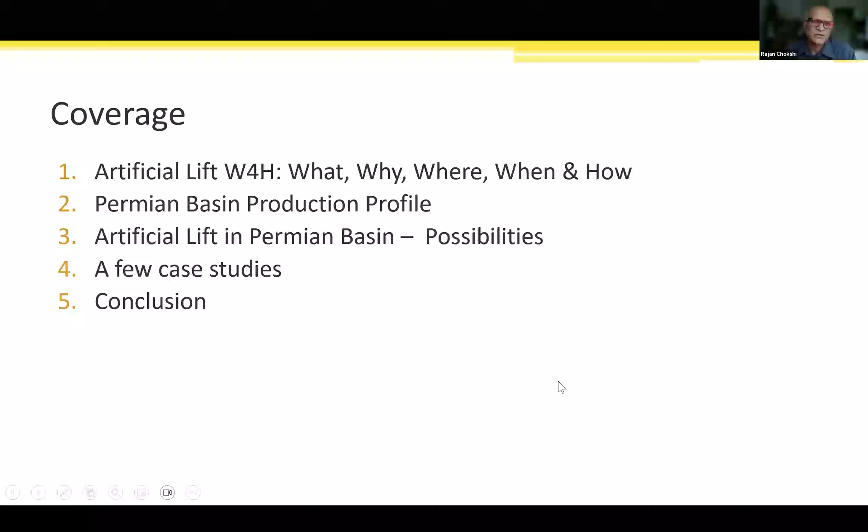Next, we will look at what the Permian Basin is and what its production profile is, because artificial lift and production profile are closely linked, so we need to understand that. Then we will go into how artificial lifts are applied, or what the possibilities are for the Permian Basin. I will sprinkle in a few case studies, though this is not representative of everything being done, because as you will see, the scope of activities in the Permian Basin is very, very large, and my knowledge base is limited too. I hope this serves as an introduction for you to delve deeper if this topic is of interest to you. So with that, let's go into the artificial lift introduction.

We have to look at the life cycle of an oil and gas well. By the way, artificial lift applies to both oil and gas wells, even though most of our discussion today is centered around liquid-dominated production.

When you look at the life cycle of a typical well, after initial prep work and drilling completion is done, you have a relatively flat plateau period which may last several years of naturally flowing production, during which production declines gradually but slowly, and then there is a sharp decline toward the later half. Traditionally, companies have focused on artificial lift during this part of the life cycle. So artificial lift applies for the majority of the life cycle of an oil and gas well - that is your takeaway number one.

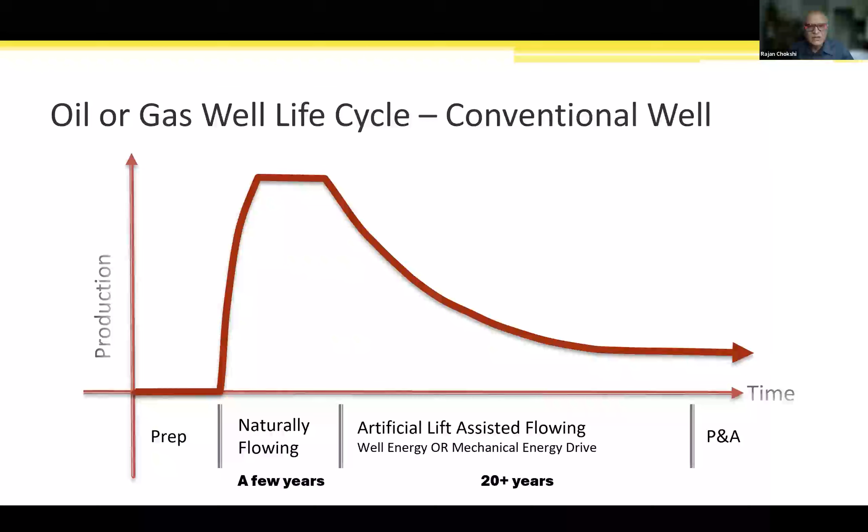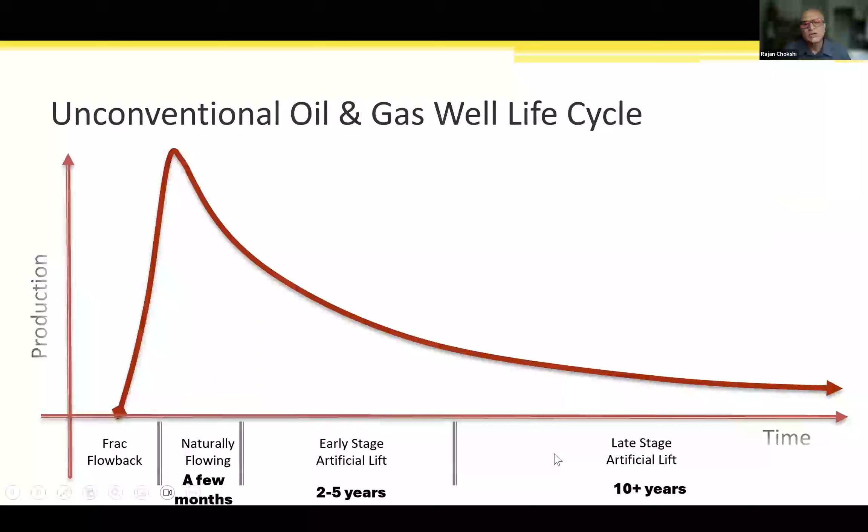Now, this is the conventional well. When you look at unconventional oil and gas life cycle, the plateau period is not as long - it could last a few months to maybe a couple of years at most. So as soon as the naturally flowing phase is over, you apply artificial lift to sustain production. Now, if you look at the artificial lift distribution around the globe, these are all guesstimates because most companies do not publish this data.

But the fact remains that nearly each and every oil and gas producing region relies on some form or fashion of artificial lift. Oil wells and most gas wells will need artificial lift at some stage in their life cycle.

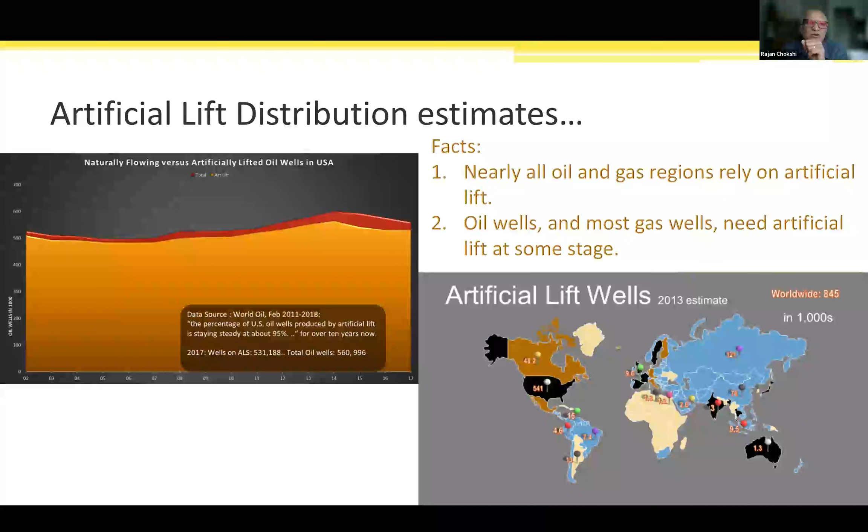A rough estimate in the US, we have more than 90% of the oil producing wells on artificial lift. And based on my informal surveys, more than 65 to 70% of the population of wells worldwide is on artificial lift. Now, why do you need an artificial lift system?

Whether it's a green field or brown field, it's basically production acceleration, or in case of brown field, when you have tired production, you have reservoir pressure decline, water cut increases, which means you have to provide some additional boost. In case of infill drilling or EOR strategy change, there will also be changes into the chemistry, or constitution, of the production, which necessitate the need for an artificial lift system.

So overall, if I have to say two words, then I would say production optimization. Production optimization of a producing oil or gas well relies heavily on artificial lift systems. Okay, when do you need artificial lift?

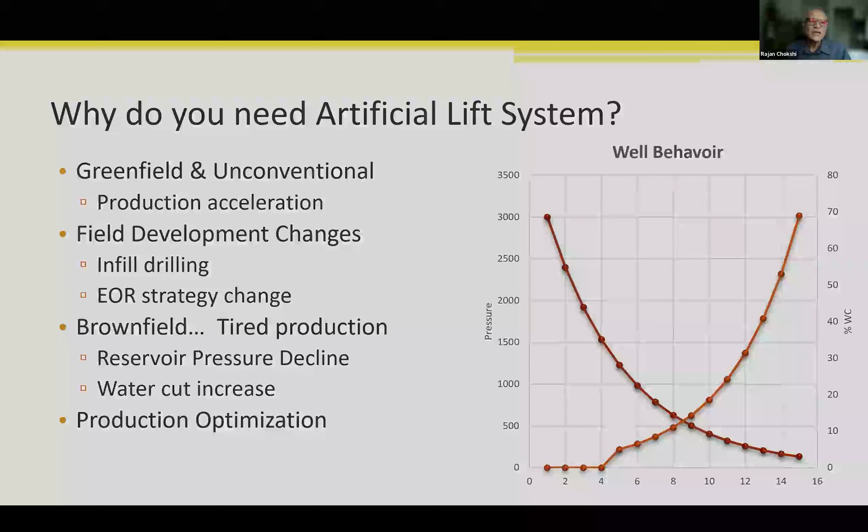If I have to give you a very simple explanation, we have two boundaries: at the wellhead, at the reservoir, and then there are some differential pressures that need to be overcome as the fluids traverse from reservoir all the way to the wellhead.

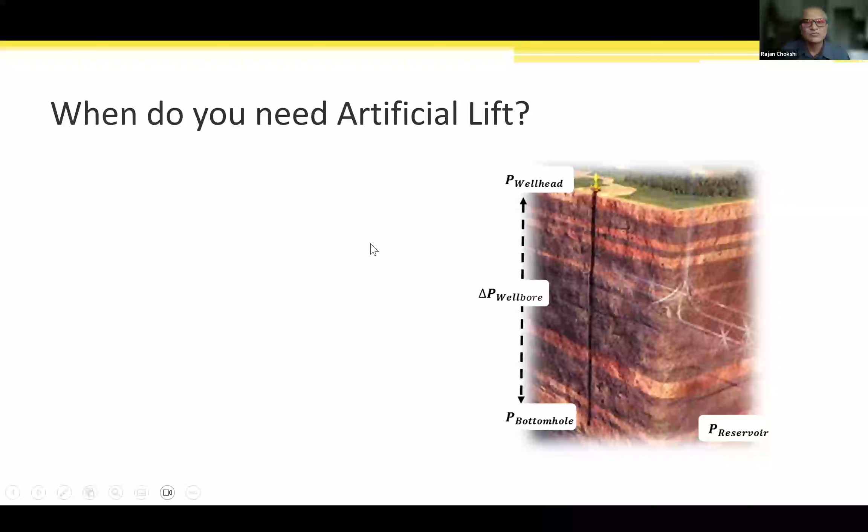So when do you need artificial lift? To bring the fluids to the surface when available reservoir energy is insufficient, meaning either the fluids do not flow, or they flow in quantities which are less than the desired quantity. This desired quantity would depend on what are the operator's expectations on the rate of return, etc.

So in short, when you require higher than natural flow quantities, that is when you must think of artificial lift. And these are the only expressions I am showing here. But if you take a small flow segment, then you can subdivide it into this kind of partial differential equation, whereby the total pressure loss over a small segment comprises of three elements: elevation, friction, and acceleration.

Elevation mostly depends on the density and the deviation. Friction would depend on the velocity and the friction factor, as well as the diameter. And acceleration, for the most part, we ignore.

And why do I talk about this? I talk about this because as you start thinking about artificial lift, you have to pay attention to: what is the density, what is my well completion profile, and what is the size of the tubular? These are the three main factors.

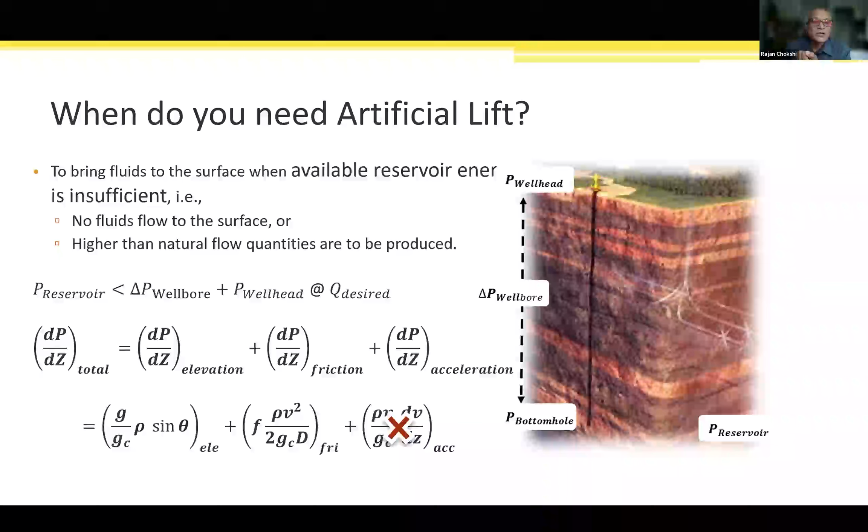Of course, you have to pay attention to the fluid characteristics, like what is the API gravity, what is the water cut, which again end up coming into the density. By the way, there are many sophisticated software packages, and you might have used some of them, available to size and design artificial lift.

As the fluids flow through the reservoir, when it comes into the wellbore, you have bottom hole flowing pressure, and then it needs to be high enough so that it can overcome flow resistance and then arrive at the surface.

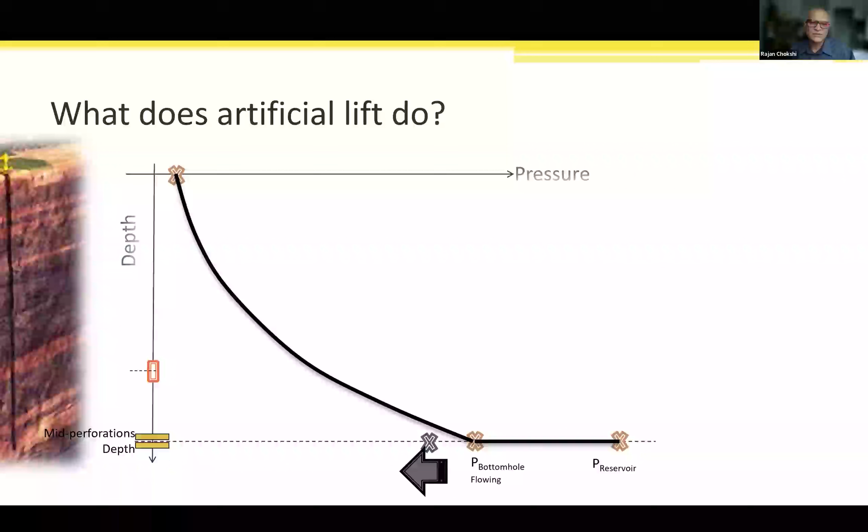Now, at some point, what is going to happen? Your reservoir gets tired. You do not have sufficient bottom hole flowing pressure. In that case, as this gray line shows, the fluids do not flow to the surface. And you have to think of providing some kind of boost, or you have to provide what is called TDH, or the total dynamic head.

And that's where this red box that I'm showing here comes in - it's an artificial lift system. You have to lower some kind of artificial lift system, some equipment, some mechanism to provide this total dynamic head or boost. There are a variety of ways you can apply artificial lift.

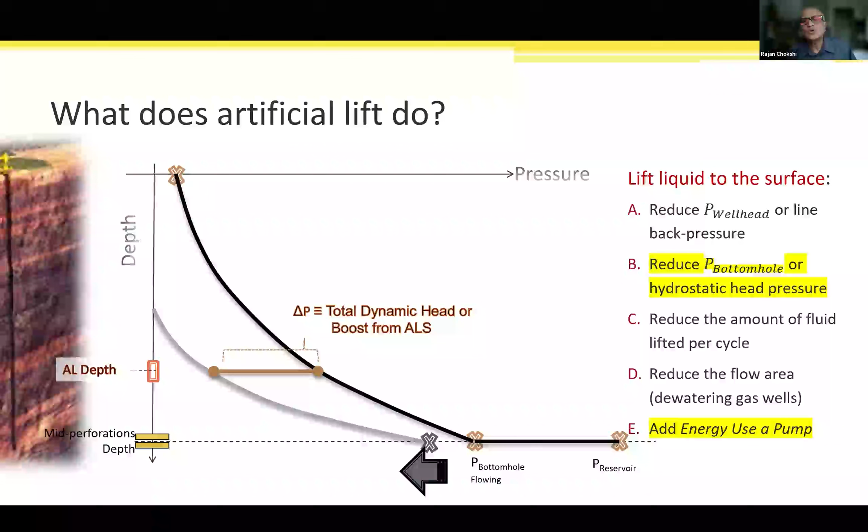You can reduce the wellhead or line back pressure. That is easier said than done, because most of the time your wellhead pressures are dictated by what your surface facilities are. You can reduce the bottom hole or hydrostatic head pressure, or you can add energy using a pump from the surface. Now, you might have seen in the nodal analysis classes this inflow versus outflow and lift capability.

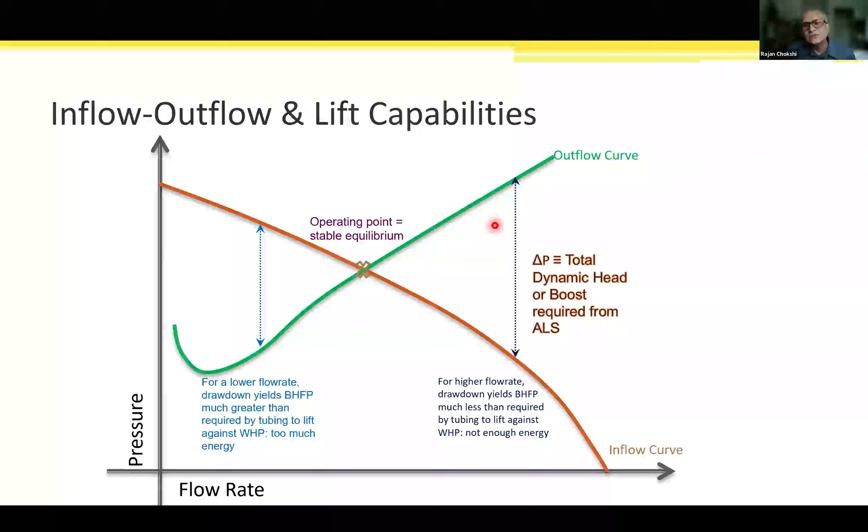This green curve is the outflow curve, which is the resistance presented by the surface facilities as well as the tubulars, wellhead tubulars. This resistance also varies with flow rate. Whenever these two curves intersect, that's what is called the operating point, or stable equilibrium. If you want to produce to the right of this operating point, you have to provide some additional boost—and that's where artificial lift systems come into play. That is your one takeaway from this inflow versus outflow discussion.

Now, what happens often with tired reservoirs, with increasing water cut and such, is your outflow curve will shift—the earlier green curve becomes a red curve, and there's no intersection. Or as reservoir capability declines, this orange curve, the reservoir inflow curve, shifts to the left. In some cases these shifts can be very dramatic and drastic. In a traditional conventional reservoir, this could take years to shift like this, particularly with an active water aquifer. In unconventional or tight reservoirs, this shift in the inflow curve can happen over a matter of months or weeks.

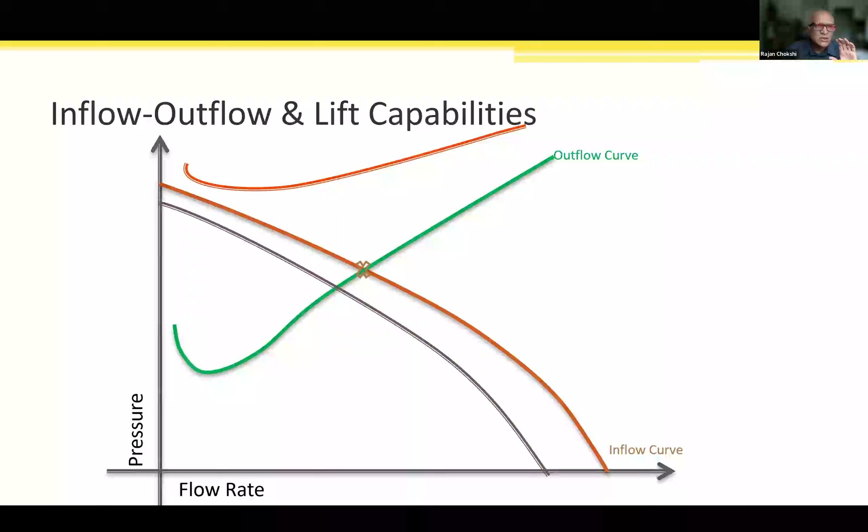So why am I bringing all of this up? Because when you're thinking about artificial lift, you have to think of this interplay between inflow and outflow—how your reservoir characteristics are changing, or how your tubular characteristics or tubular response is changing. That brings us to a quick intro to different types of lift systems.

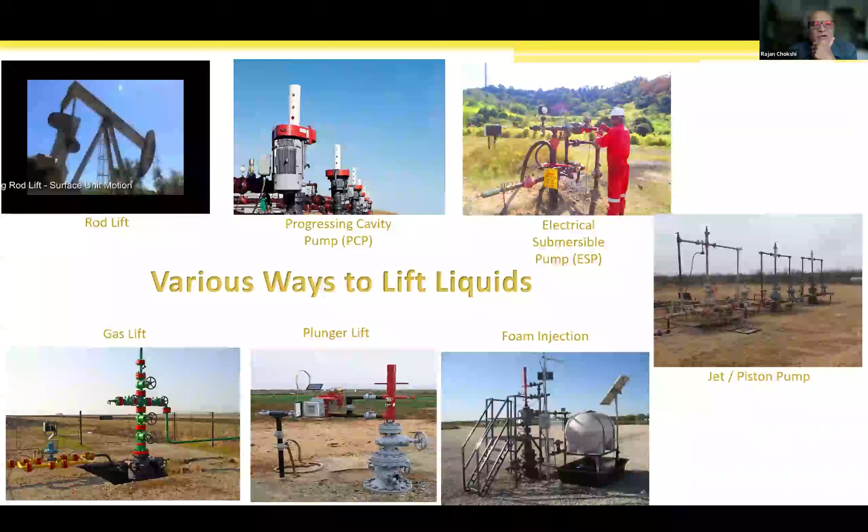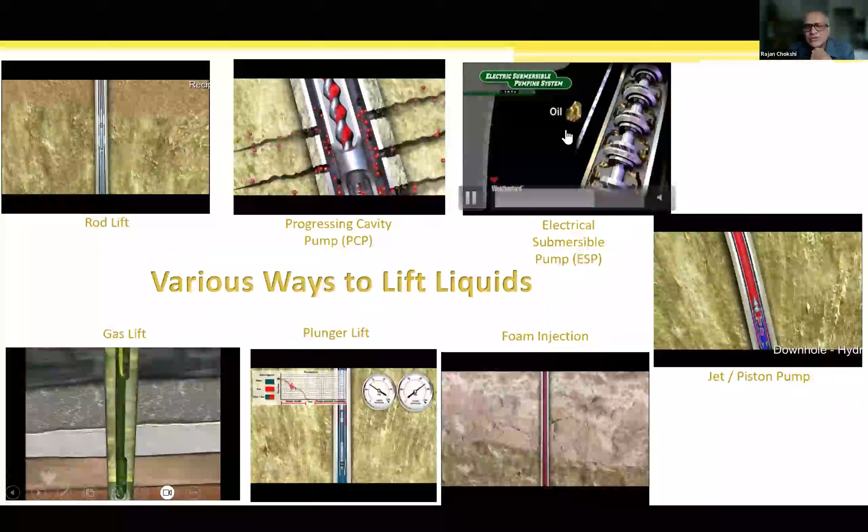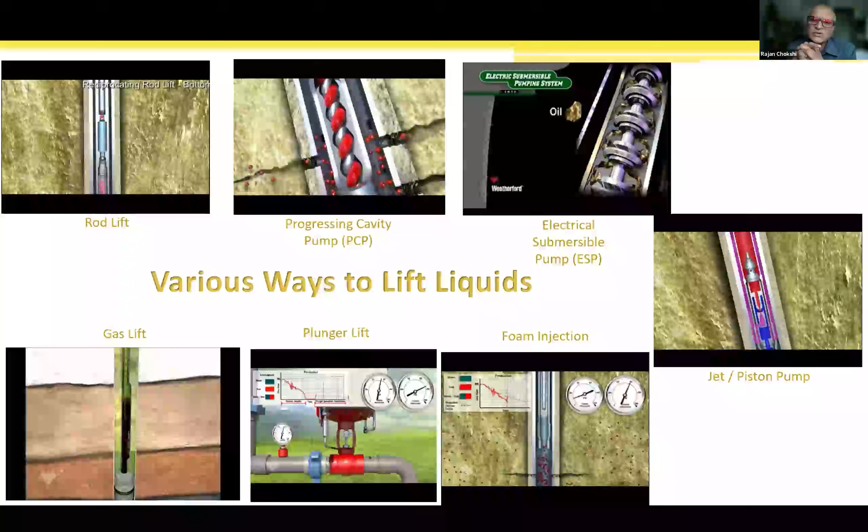On the top left you see rod lift, reciprocating rod lift, or sucker rod pumping, which is kind of the ubiquitous symbol of our industry. But that's not the only lift system—we also have progressing cavity pump systems, electrical submersible pump systems, jet and piston pumps, gas lift, plunger lift, and foam injection, with a few variants of each. For practical purposes, if you remember these 8 forms—counting jet and piston pump as two different ones—you've got your basics covered.

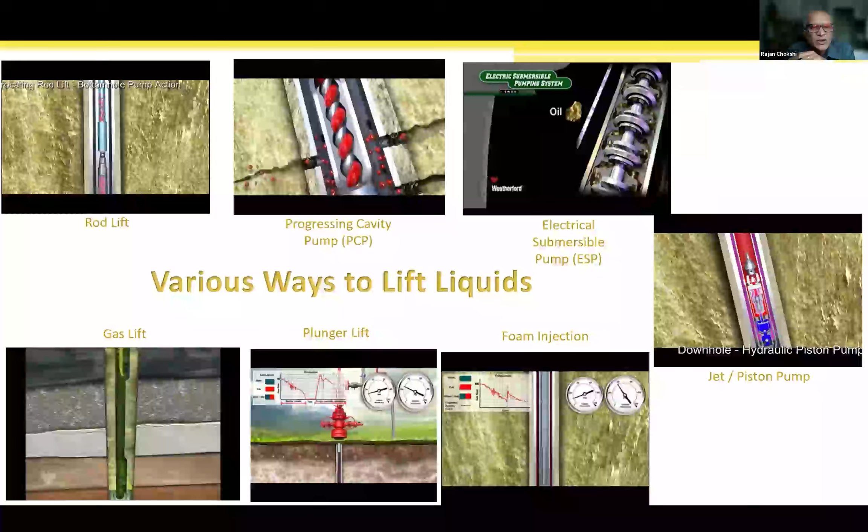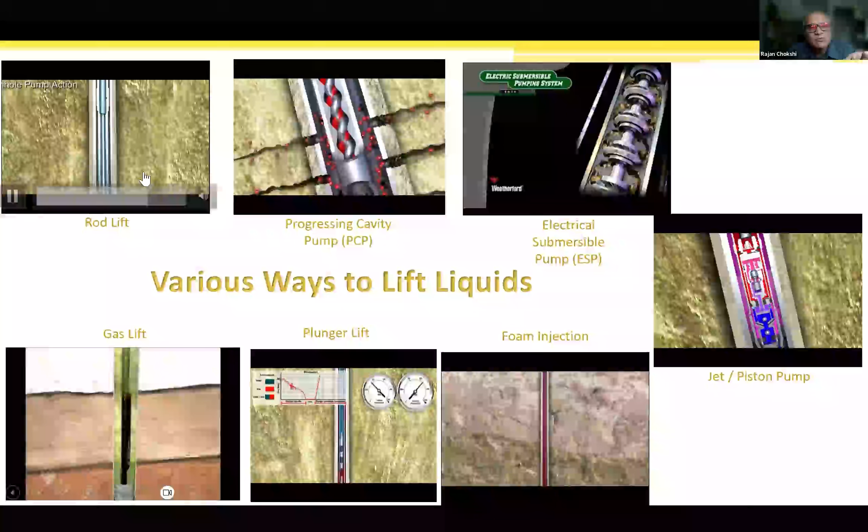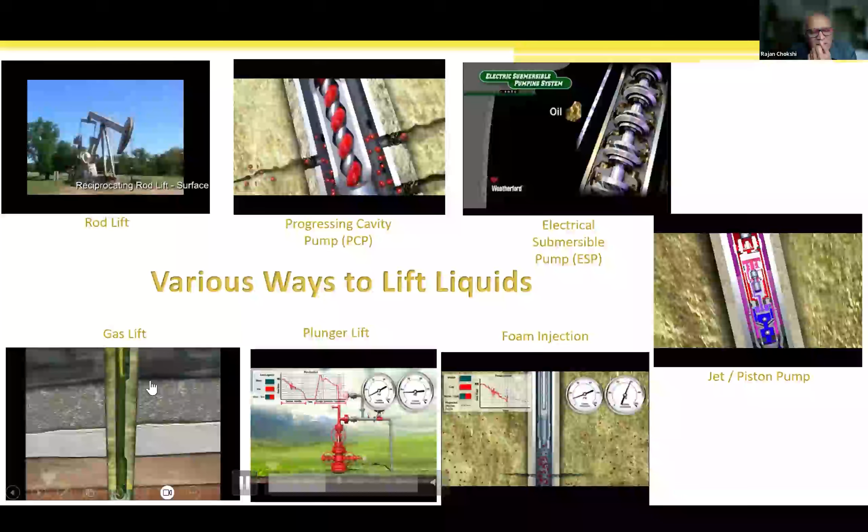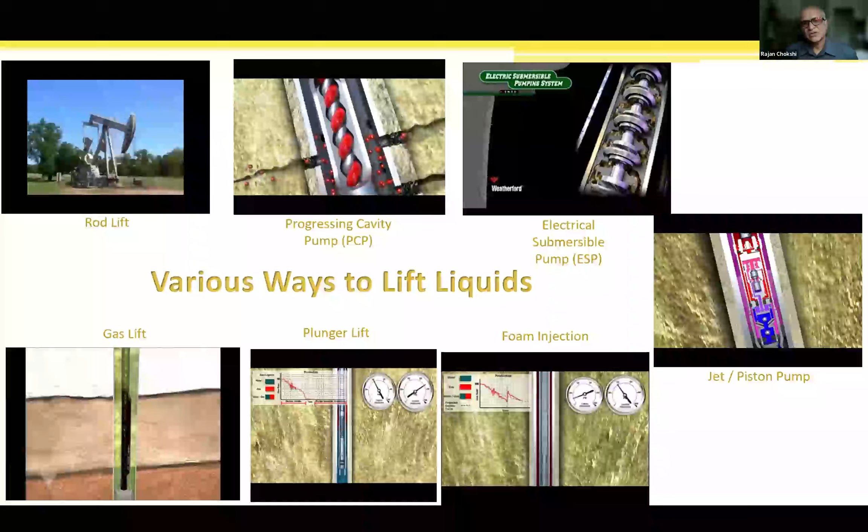So what you're looking at in this slide is that there are different lift mechanisms and they work differently. Some have reciprocating motion, some have rotating motion downhole, some have electrical centrifuge, and some don't have any pump at all, like gas lift, plunger lift, or foam injection. In gas lift, gas is simply injected and you're lightening up the load—remember the density term I showed earlier? My intent is not to make you all experts in different forms of artificial lift systems. Your takeaway is just that there are a variety of ways to lift liquid.

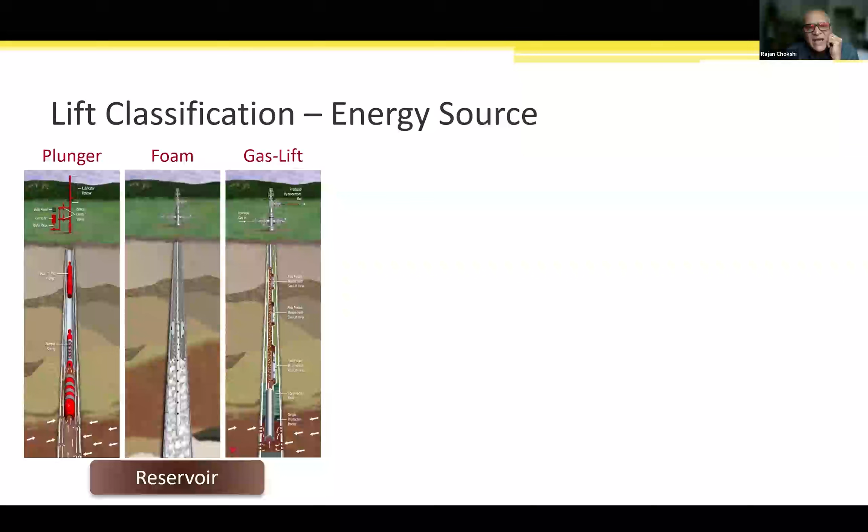Now, you can classify lift systems into different buckets depending upon the source of energy. Plunger lift, foam lift, and gas lift are primarily driven by available reservoir energy, whereas rod lift, piston lift, PCP, jet pump, and ESP—anything that has a pump—require some kind of intervention in the wellbore. You lower some device that is energized from the surface. So everything on the right side of this partition requires some sort of energy source at the surface to drive the pump downhole.

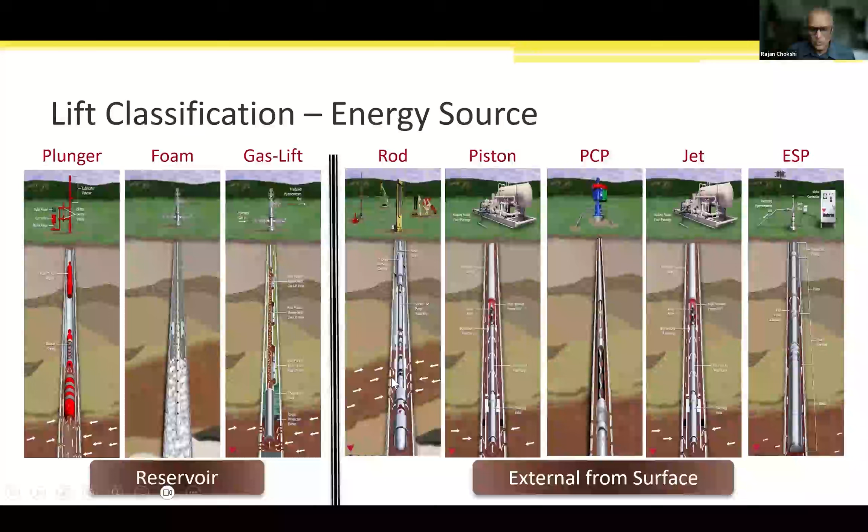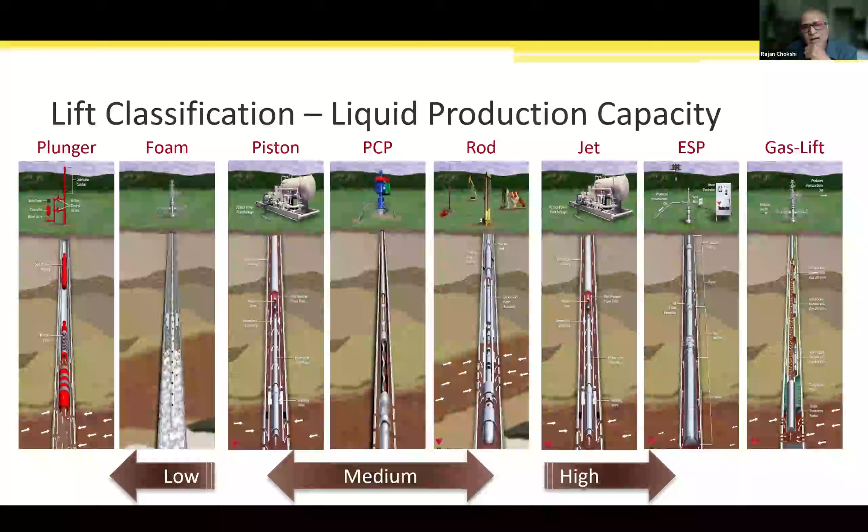Now you have seen a variety of lift systems, a variety of options and possibilities. This becomes quite a challenging task if you are being asked to select or design a lift system. So there are a few things you have to remember before you launch into that. One is that well production is highly dynamic, and lift system requirements can occur at any time during the well's life cycle. Different types of lift systems can be applied on the same well at different times, meaning you have to think dynamically.

You have to keep an eye on the well production. It's not something you set and forget. Artificial lift systems' efficiency and reliability change over time, meaning you have to be aware of making continuous adjustments for optimized operation so that you have the lowest cost of lifting.

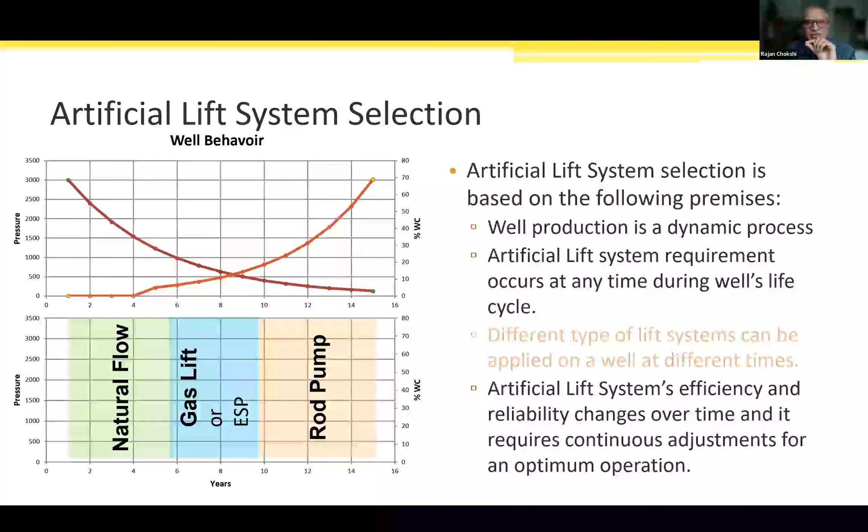And that's why the industry has devised digital oil field approaches, which is not part of this presentation. There are lots of machine learning algorithms being utilized to make sure operators can track the lift system's efficiency and reliability. Moving further on, the lift technology application process.

You always start by establishing the target production levels and conditions. You have to understand the reservoir potential, predict it, and figure out what are the reservoir and surface facility constraints. All of this would be covered under reservoir analysis, wellbore analysis, and nodal analysis. So nodal analysis forms the basis of most of the design and analysis decisions you make for artificial lift.

Then you have to remove the technically infeasible lift technologies. For example, if you're looking at a well that is supposed to produce more than 1,000 barrels per day, you can say at the outset, I'm not going to consider plunger lift or capillary injection. But still, you'll have some 4 to 5 options.

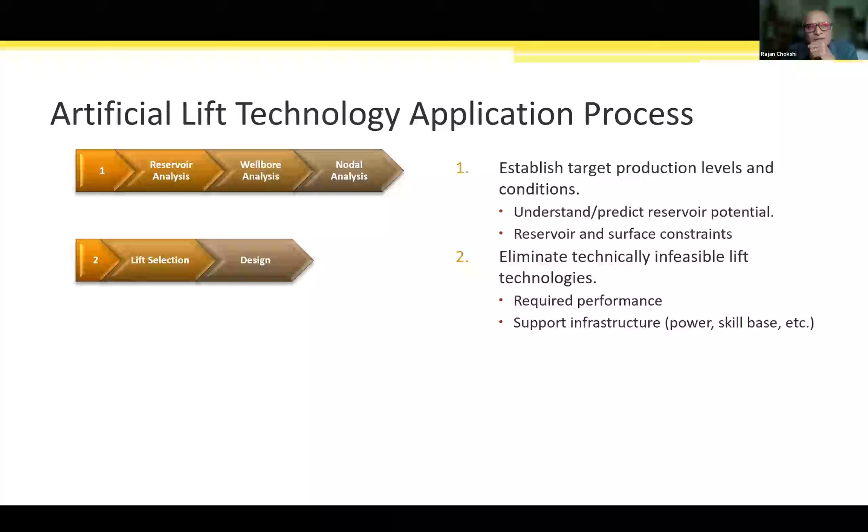Then you think in terms of, okay, what support infrastructure do I have available? What is the required performance criteria, and over what range does this lift system need to operate? Meaning the lift selection process requires some careful thought and consideration.

After you have selected a specific lift, then you have to launch into the design process. Again, for design, you have multiple options. This is not the talk to talk about that, just to make you aware that there are a variety of tools available in the market, and also all vendors, lift system vendors, who provide assistance to operators to design the equipment.

Once you have done the design, then you go into economic evaluation, figuring out what will be your installation, training cost, acquisition cost, operating cost, etc. Perform some risk analysis if that is what your stakeholders require.

And finally, once you have that lowered, you also have to think in terms of optimization. What type of optimization do you have to perform at the well site, at the back office, or what I call desktop optimization, and what type of collaborative practices do you have to install? Again, I teach all of this over a one week curriculum or a semester long curriculum, so this is not comprehensive, but if you take this blueprint and what I've discussed until now, you have covered most of your bases as far as artificial lift is concerned, at a very, very high level.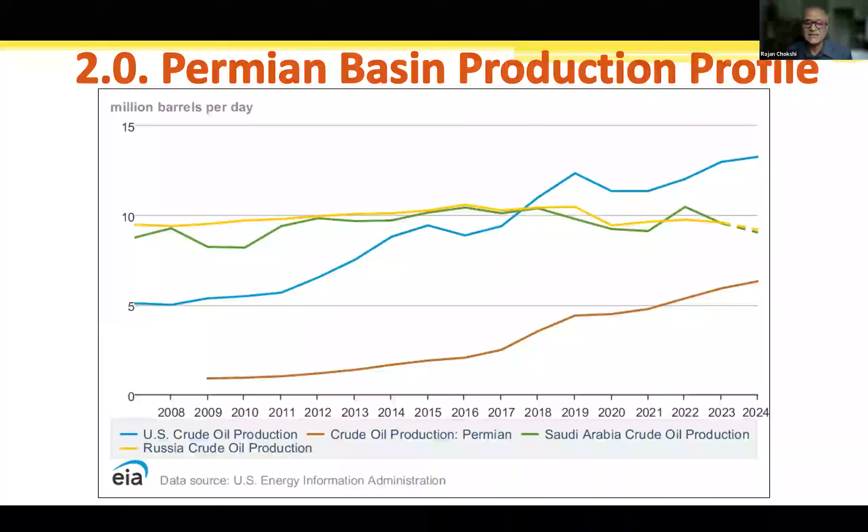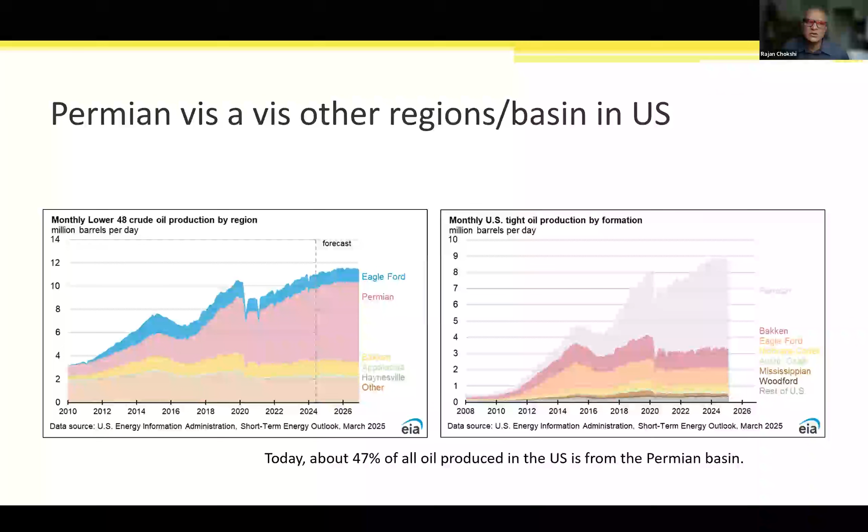Within the US, Permian is producing more than 47, 48% of the oil produced in the US. Relatively, you see Eagle Ford in blue, Bakken in yellow, Appalachia, and Haynesville. The Permian story started unfolding in 2014, even though Permian has been around for over 100 years, mostly conventional. 2010 is when things started changing, and we began to see unconventional production.

Here are some more numbers, monthly tight oil. When you look at the geography of the Permian Basin, it is staggering in size - almost 86,000 square miles covering 2 states, Texas and New Mexico, more than 7,000 fields, and 55 counties in West Texas and Southeast New Mexico. You can see not only the scope of the Permian, but also the scope of the production profile across it, and that is where the artificial lift choices become very, very interesting.

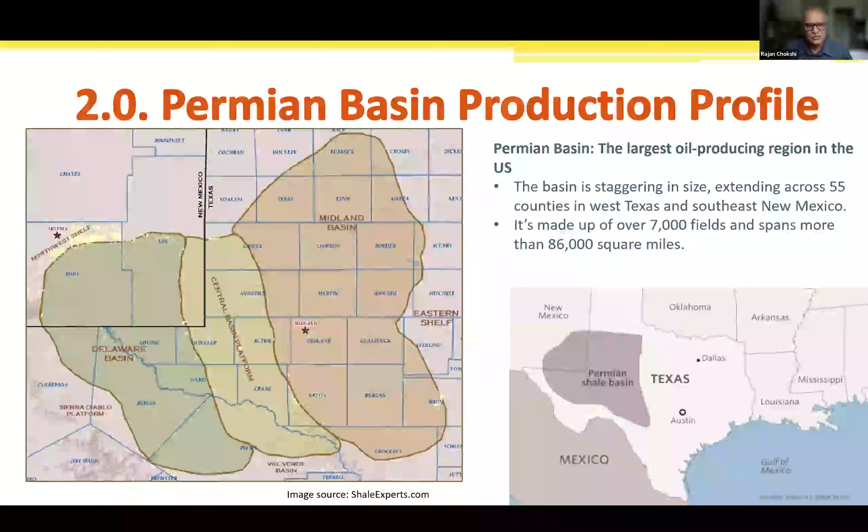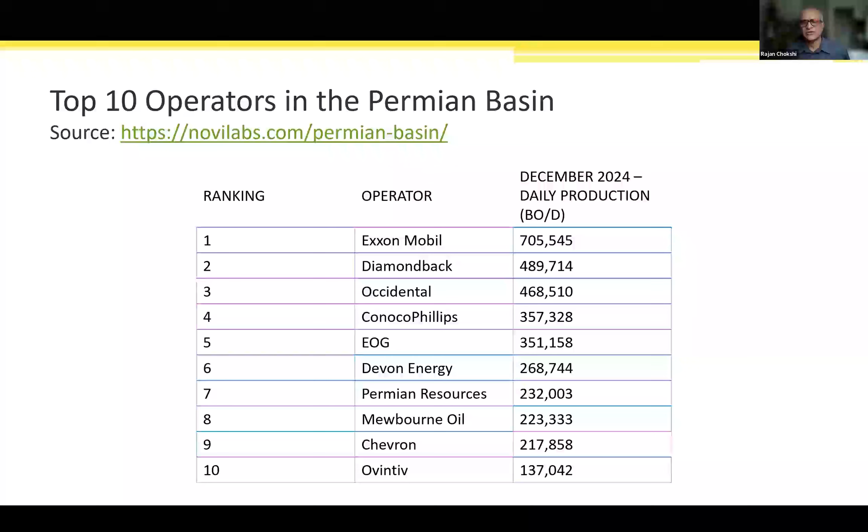If you are interested in this type of stats, here are the top 10 operators. Exxon is up there because of the acquisition of Pioneer. These are not just the 10 operators - we are talking about hundreds of operators in the Permian Basin. Some of them are producing as little as less than 10,000 barrels per day, while Exxon is almost producing 700,000 barrels of oil per day as of December 2024. So each and every one of these operators, whether producing less than 10,000 barrels or almost 700,000, will need artificial lift.

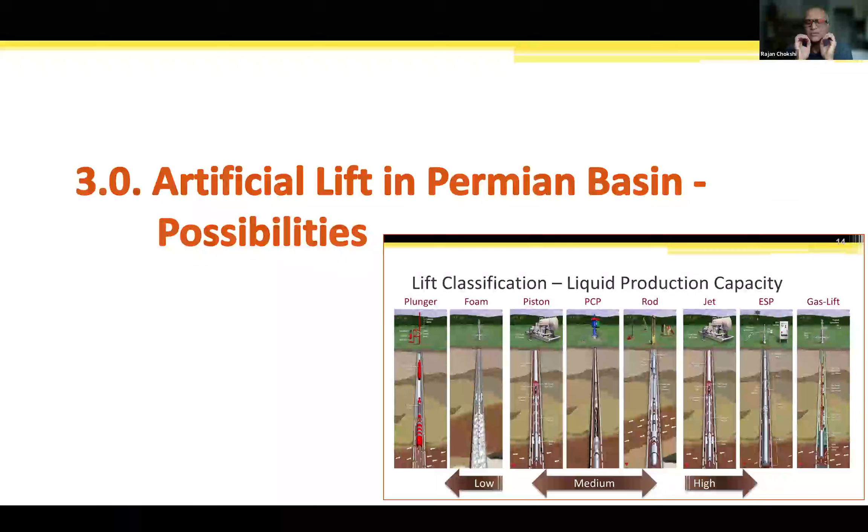And that brings us to artificial lift in the Permian Basin. You remember seeing this graphic in the bottom right corner, which tells you how we have a plethora of options in terms of artificial lift when you think purely in terms of liquid production. But that is not the only parameter - you have to also think about the production challenges specific to the Permian.

Before 2009, 2010, it was mostly conventional production - a tertiary production, mostly ESP and rod lift. We were lifting nothing but water practically, more than 90% water cut type of production, and there was active CO2 injection and water injection going on in the Permian.

Come the unconventional revolution, and now what we are seeing is well depths going up to 8,400, 10,000 feet TVD - one of the deepest I saw was 17,000 feet true vertical depth. Average lateral lengths are creeping up too - it started at a couple thousand feet and now 10,000 feet is fairly common, about 2 miles long. So it's a very deep, long slender well geometry.

Another thing to think about is that this lateral is a kind of separator - meaning we have quite transient, mixed phase, sluggy, and turbulent flow happening in this well compared to production from a conventional well, because of the ultra low permeability and stimulated reservoir volume we generate with fracturing. You're going to see a high initial rate followed by a steep and rapid production decline.

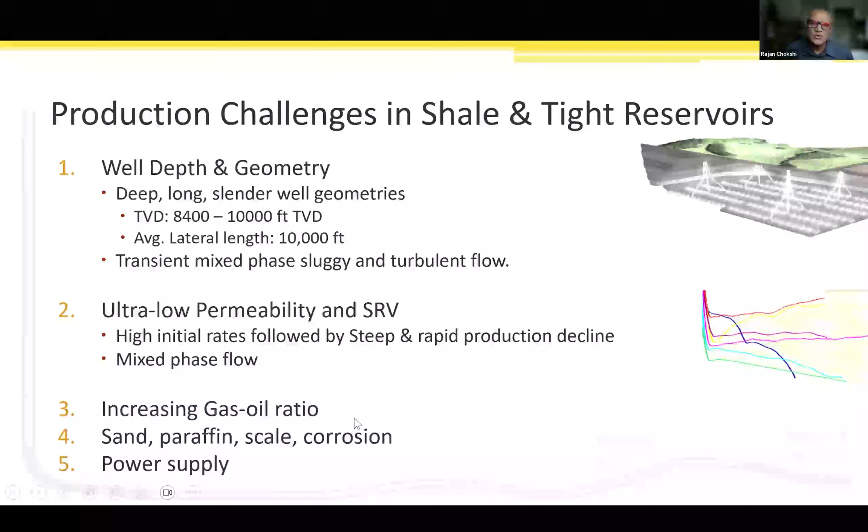Each and every well that is in the tight formation or shale type of production, you are going to have this production characteristic. We'll come back to that in a minute. Another thing we have seen is the increasing gas oil ratio, sand, paraffin, scale corrosion, and the power supply. These are the production challenges. Why do we have to talk about production challenges? Because that is what drives the selection of artificial lift.

In case of unconventional production, it's not only a Permian story. Any basin in the world that has unconventional or tight production, you're going to see that as soon as the well is fractured and put on production after fracture fluid recovery, there is a sharp spike. In the early days of unconventional production, it was not uncommon to find almost 60 to 70% drop in production in the very first year.

Nowadays, with better identification of the prime asset to drill, better identification of source rock, better fracturing practices, more longer laterals, and better choke management practices at the surface, we are seeing some of these wells maintain or sustain behavior like a conventional well, with natural flow possibilities at significantly higher rates for maybe a year, or even in some cases two years. But the fact remains that there is an early production phase and then the production declines into a late production phase.

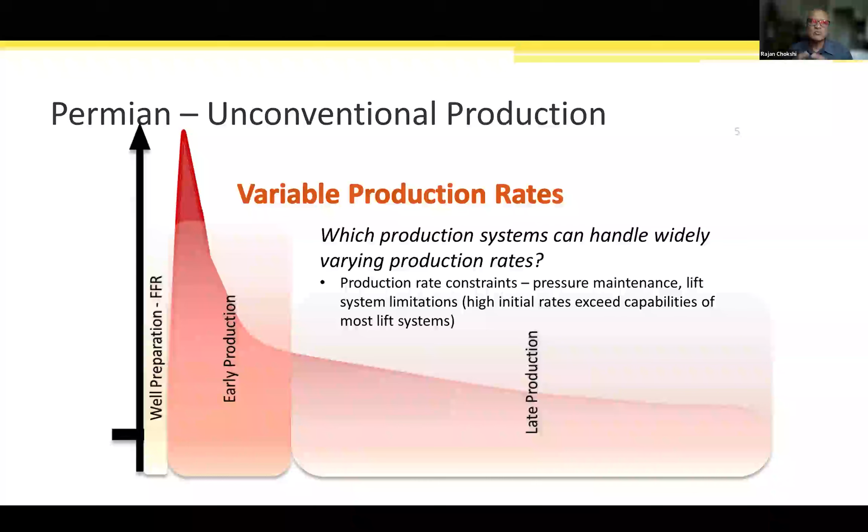Then, as production starts going down, what happens? As the pressure goes below the bubble point pressure, the gas starts separating in the lateral. You are going to have not only higher gas content, but highly turbulent gas bubbles followed by liquid slugs. So there are lots of challenges. Not only pressure maintenance, but lift systems are also limited because most pumping systems assume that the liquid coming into the pump body would be fairly homogenized with less amount of gas.

So going back to the artificial lift choices during the early production phase: higher rates, some solids coming back, and not as much gas. In that case, you can think of jet pump, because jet pump is frequently used for fracturing fluid recovery phases. Traditionally, it is used for that. Then you can think of gas lift and ESP.

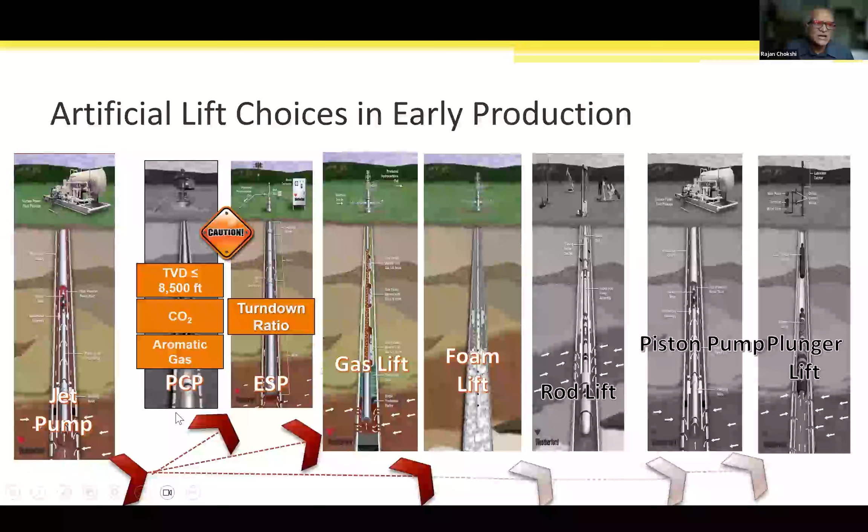Foam lift is only applicable when you have gas dominated production. Otherwise, for liquid dominated production, it is gas lift, ESP, and jet pump. PCPs cannot be applied because of true vertical depth limitation. CO2 and aromatic gases can also be an issue, plus they have limitations in terms of production.

ESP manufacturers had a lot of problems handling this significant decline, and that's where they have come up with a new generation of ESPs that can handle a wide range, meaning a pump can start at 2000 barrels and go all the way down to 500 barrels. From the operator side, what you want is a device that stays in the well much longer. Otherwise, you may have to call the workover rig, and that intervention not only loses you production, but also costs money, plus you have to get new equipment.

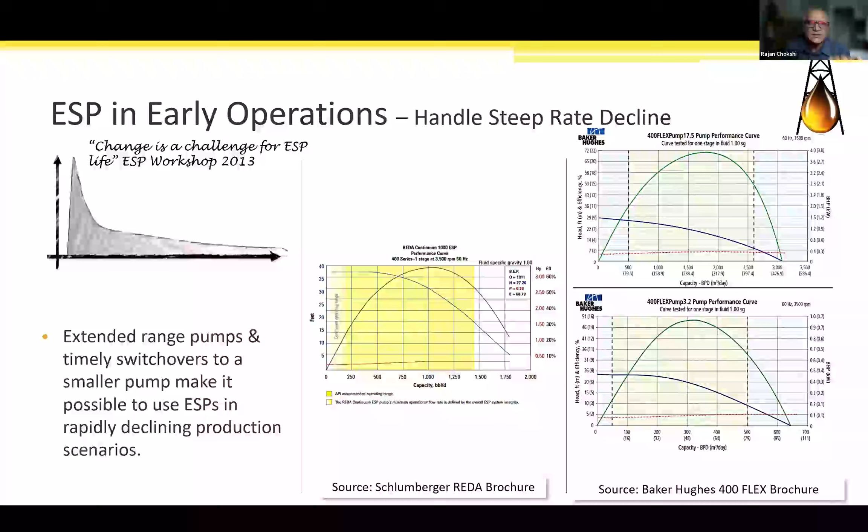So this is one of the wish lists of the operators: give us a system that will stay there longer. Here is one case study from ConocoPhillips on what they are doing in the Permian. This is their lift type selection across the globe, whether it's Permian, China, Norway, Alaska, or Canada. In the Permian, which is this blue bar I'm hovering over now, they are using rod lift, followed by gas lift, followed by ESP.

These are the three main methods they were using in the Permian. That is for typically low GLR wells and high productivity wells, they used annular flow gas lift.

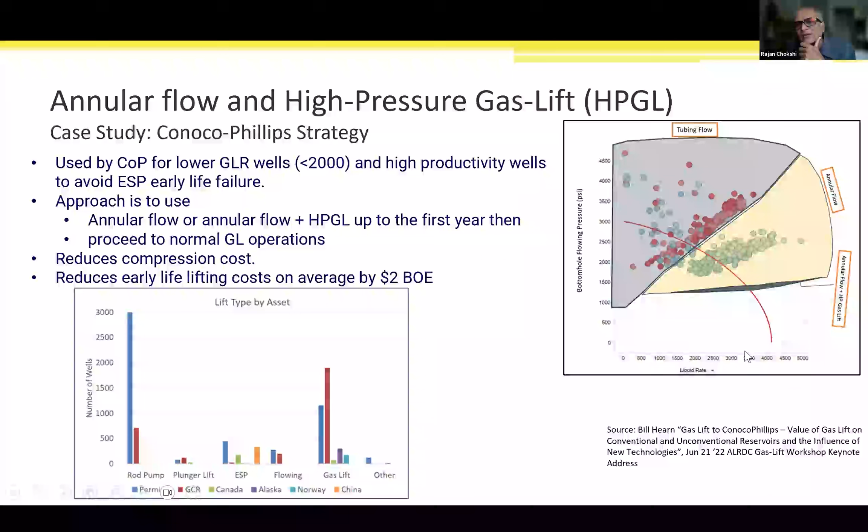This is a somewhat complicated graph, and we don't have enough time to go over it in detail. Your takeaway is that ConocoPhillips focused more on the gas lift application, followed by rod lift towards the later part of the well's life. But in the earlier part, they used annular flow followed by tubing flow, and then could use a different type.

Here is another graphic from an SPE paper. What they are showing is how they use hydraulic jet pump in place of ESP to lift the fluid. Look at the amount of fluid being lifted, about 300 barrels of oil, and maybe 250 MCF per day of gas. So jet pump has been used.

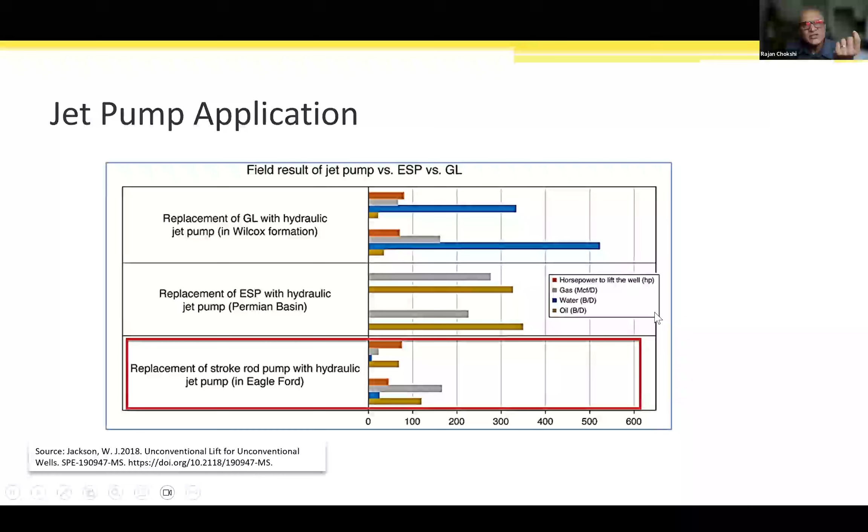So we talked about ESP, gas lift, and jet pump in the earlier part. Now let's talk about mid to late life production. As I said, mid to late life production has lower production rates. In that case, your choices are typically rod lift, piston pump, varieties of plunger lift, gas lift combinations, and then jet pump.

Now, most operators in the Permian, once production declines, go towards rod lift because rod lift has a significant knowledge base. There is significant familiarity with rod lift amongst field operators and field hands. So rod lift continues to be the preferred mode once production is less than 500 barrels.

Some people may challenge me that maybe we can even go higher than 500 barrels per day production. But my estimate is it's typically preferable to switch to rod lift once you go below 200 or so.

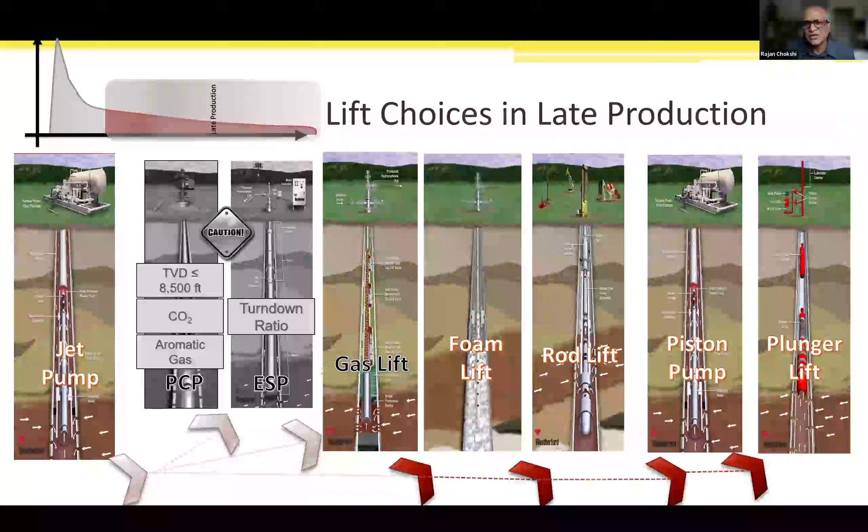Here is another case study from Occidental. This is somewhat dated from 2017, but at that time their chief production technologist, Shawna Noonan, said this is how they were envisaging the life of a well progressing in the Permian. That happened because they had a significant number of failures with rod lift and with ESPs. So they said, okay, we'll start with annular gas lift, then move to conventional gas lift, then intermittent gas lift, then what people call GAPL or gas assisted plunger lift, and then to chamber lift.

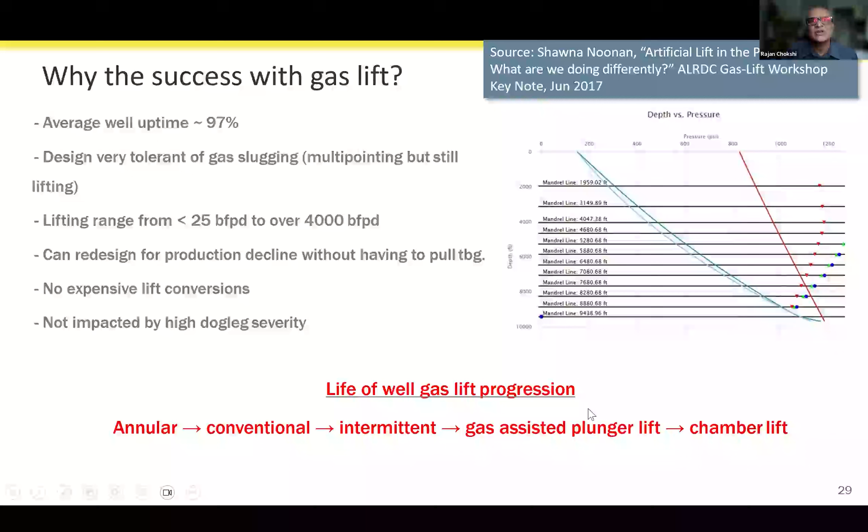This brings me to the last couple of slides, and I'm intentionally keeping 15 to 20 minutes for questions and answers. I see some activity going on in the chat box, but be thinking about your questions and feel free to ask me to go back.

Now, what are your main takeaways from this about 35 minutes of the presentation so far? One, artificial lift systems are ubiquitous in oil and gas fields because the lift system requirement can occur at any time during each and every well's life cycle.

There are a variety of lift systems. We looked at ESP, PCP, gas lift, rod lift, jet pump, piston pump, plunger lift, foam lift. And then there are some combinations of them also.

So there is a plethora of options, but not all lift options will be applicable for each well or even a well type. Oftentimes, when I'm teaching this class, people say, tell me this type of well, what type of lift? And I say, it depends. I have to look at a variety of things.

And what do you look at? You look at what is the depth, what is the production rate, what is the tubing size, what are the surface constraints, whether you have electricity available at the site or not, whether you have sufficient gas available or not, and what is the knowledge amongst your people. Do you have to train them into a new lift system?